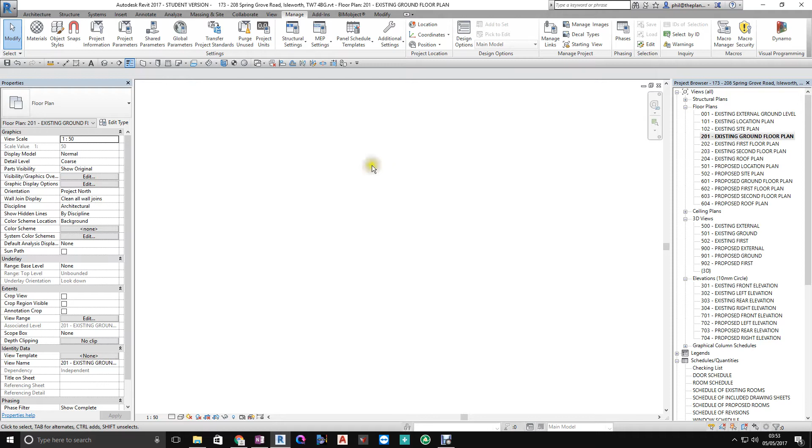What we're looking for is views, then floor plans, then existing ground floor plan. Double click on it and it'll open this window up here. What you need to do then is come down here and click on the light bulb. That reveals hidden elements. To make the drawing tidy and look alright, you hide certain things on certain occasions.

In this case we've hidden this thing here down here, which is known as the project base point. You'll never see it printed, but it's pretty crucial to the way Revit works. It's where it knows how, basically where the centre of everything is. And what we want to do here is make sure that that is in the centre of the screen before we insert the survey drawing over it.

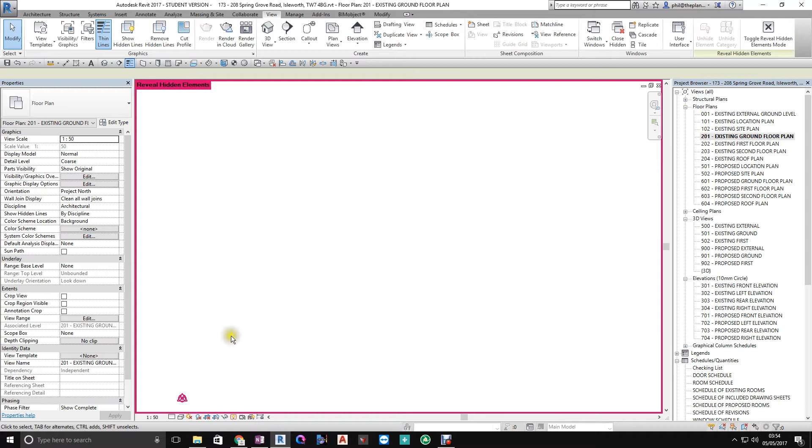Now I can't actually find the button because I always do this with a keyboard shortcut, and I haven't been able to find the button. But the other way of doing it, once you've got this reveal hidden elements, once this is red, you can use your mouse wheel to zoom in and out, which should help you find it. You can double click on your mouse wheel and that will zoom to show everything in the view.

Does that explain it? You've got the wheel that you roll forward to zoom. Double click on it and that will zoom it all to... zoom extents is what it's called.

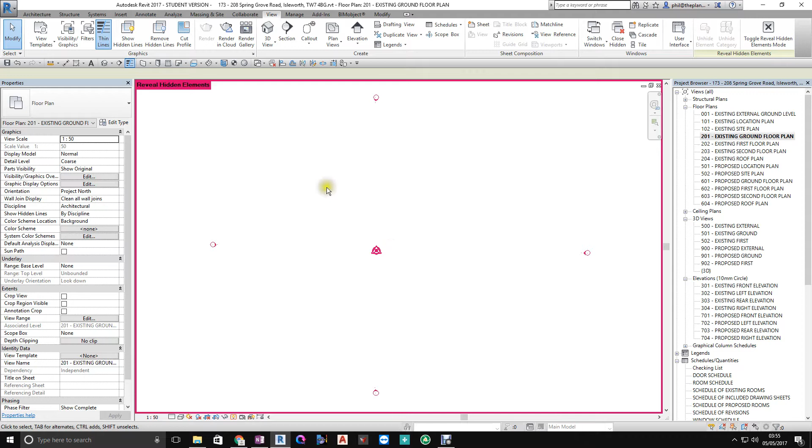Okay, so now that you've got that back in and you know that you're going to be in the centre, you can go up here to the Insert tab and then click on Link CAD.

On your quick access bar at the side here, click on Current Contracts, and then down here we're going into our job folder, which is Spring Grove Road. If ever you're struggling to see these, up here where these titles or headings are, if you move it so that you get this sort of black vertical line with arrows, click with your left mouse and hold it, that allows you to drag that out so you can see the whole thing. Sometimes you might not be able to see what you want to see.

I'm using the mouse wheel to scroll up and down. You can click and hold that to drag it. You can click in the space to jump it down the whole gap, or you use the arrows to go one by one.

Right, we digress. We go into the job folder, we go to planning, we go to survey, survey data, and then Redstick. Probably too many folders there. We could get rid of some, but yeah, another thing I haven't got around to.

We need to come down here to files of type and select DXF. Then our survey drawings will magically appear. Click once on ground. You can actually double click there, but if you want to be sort of cautious, click once and then open.

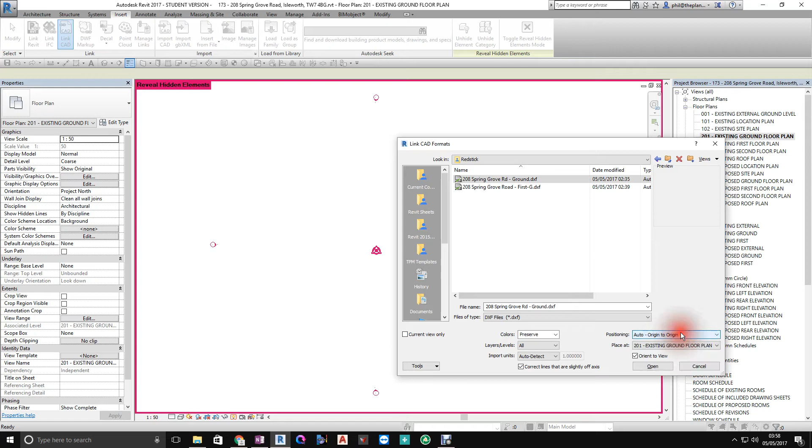This positioning has to do with that project base point, and this is telling us, when we link the CAD, where to link it or how to link it. Again, don't use it. Origin to origin is absolutely fine.

This 'place at' should be automatically populated from when you double clicked and selected this view up here. If it isn't, just double click and make sure that you've got the correct floor that you're wanting to insert the drawing on. In our case, existing ground floor. Click open.

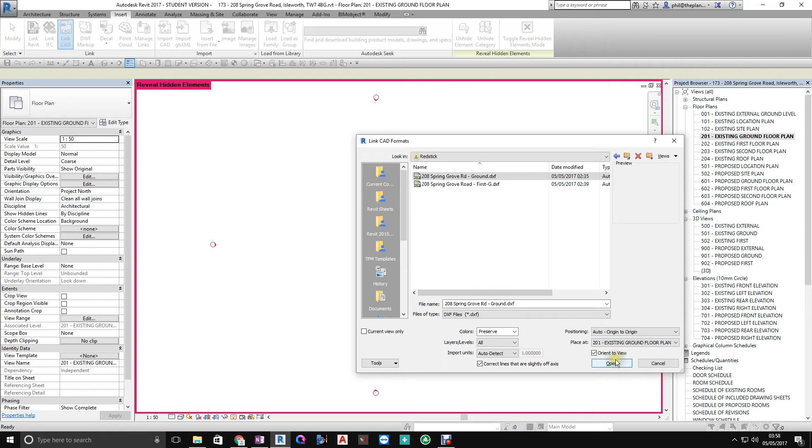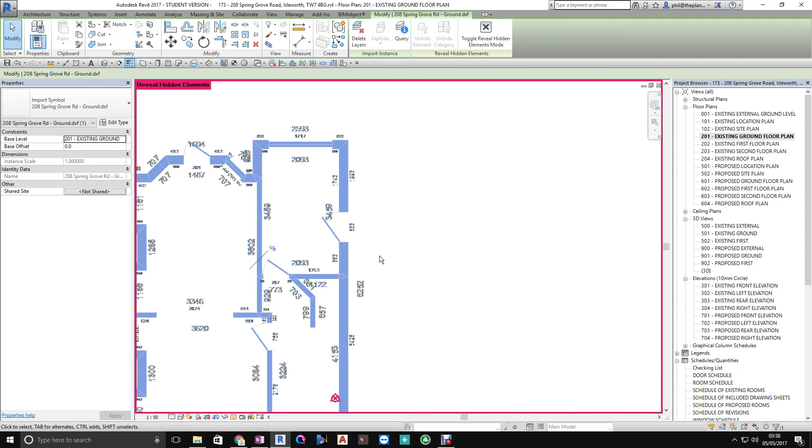There's our drawing. We need to click on it once, and then we need to find our pin, hover over it until it changes colour, click on it once, and that unpins it. You see it's now got a red X next to it. That unpins it. When it's pinned you can't move it.

What we want to do is move it so it's vaguely central. It doesn't have to be anywhere near exact, it just helps us. These little symbols out here dictate our elevations down here, so that's why we want it central, so that we're catching them all.

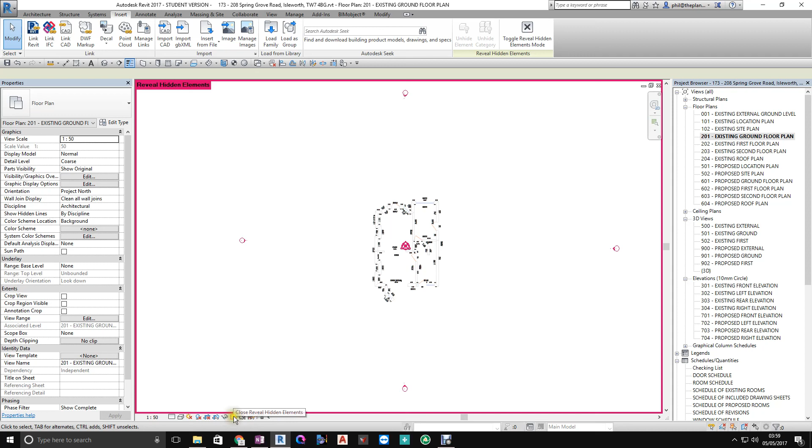Now that we've done that, we can turn off our reveal hidden elements, so that we're left with just our drawing. And then you can either zoom in with your wheel or double click on the wheel, and that will zoom it to its maximum size.

Go up to the top, click on the R, click save.